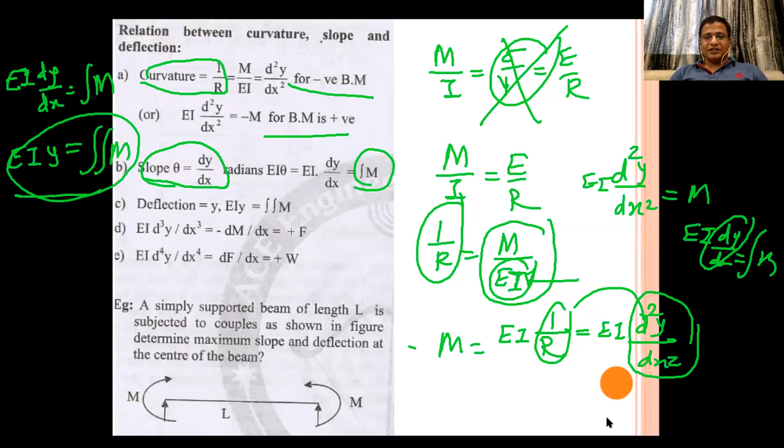So integration of dy by dx becomes y, and then you will get the double integration of m. This is how things work, and that is the fundamental for slope and deflection. What you see here is order reduction takes place - meaning there is a one-level order difference between slope and deflection.

Similarly you have the same kind of relationship for shear force and load, which we have also seen in the flexural case. So you can remember that too. These are some of the pointers you will need for solving problems or giving theoretical answers.

So what are the methods for calculating slope and deflection? There are 4 methods actually. Here it is written Macaulay's method. Besides that, the last type of method comes under a category called energy methods. All these fall under energy methods, whereas the others are kind of empirical or analytical methods.

One is the double integration method - just now what we saw is the double integration method, and we have to remember, this is not suitable for solving big problems.

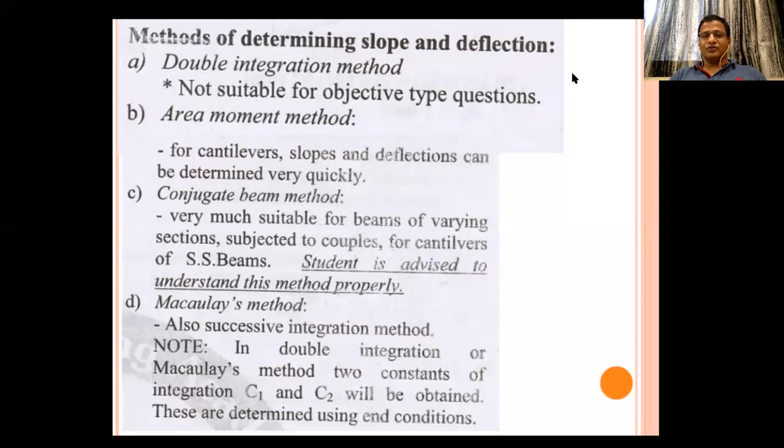So mostly whichever problem comes, you should start with a conjugate beam, and then Macaulay's method for very few cases, otherwise that is not preferred. Another method, energy method, we will see, that is also very important. Moment area method - you have to understand what is the moment area method. There are two theorems.

Hello, I was disconnected. I hope all are there.

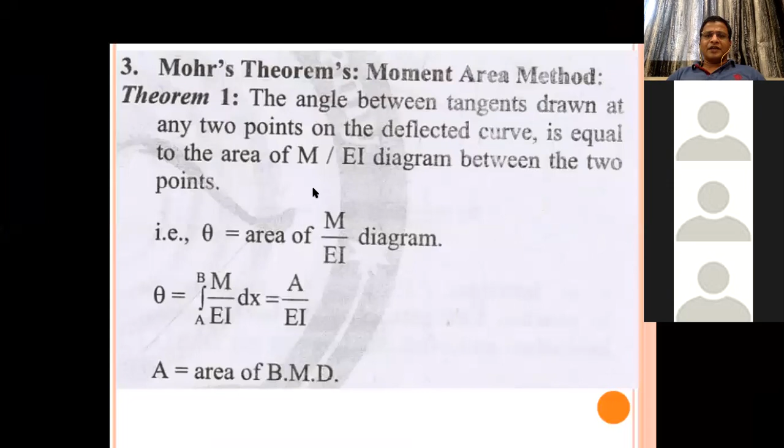Okay, so what we are seeing is the first method, that is the moment area method. In moment area method, what we see here is the angle between two tangents drawn at any point on the deflected curve is equal to the area of the M by EI diagram between the 2 points.

And what is the difficulty in this method is this: if one angle is not zero, then it becomes complicated. Because this formula is θ1 minus θ2 equal to area. Actually whatever theta is written here, this is θ1 minus θ2. And when it is a cantilever beam, the fortunate good part is that one side's slope, when you draw 2 tangents...

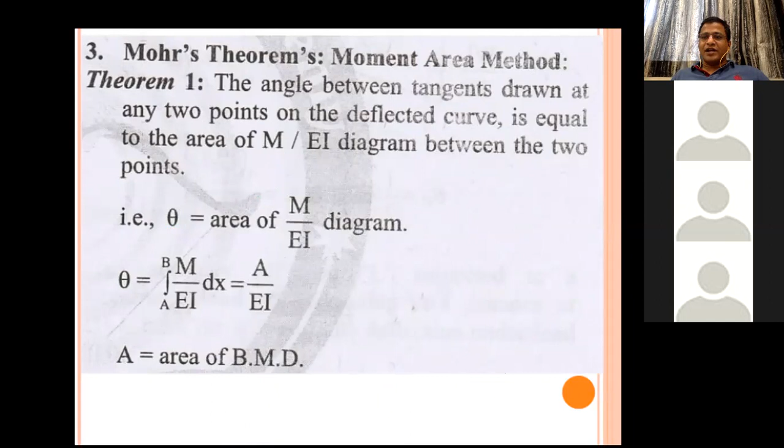one side's slope is 0, the other side's is non-zero. That's why this method is good for a cantilever beam. But in case of simply supported, if you draw two tangents, there is one theta1 on this side and theta2 on this side, and that time slope calculation becomes difficult. That's why for the simply supported case, this method becomes complicated, but for the cantilever beam it is very easy.

You can quickly get the answer for the cantilever beam. So slope is nothing but the area of the M by EI diagram, that is the bending moment diagram - you have to get it and then divide it by EI to get the answer. Similarly, you can calculate using the second theorem.

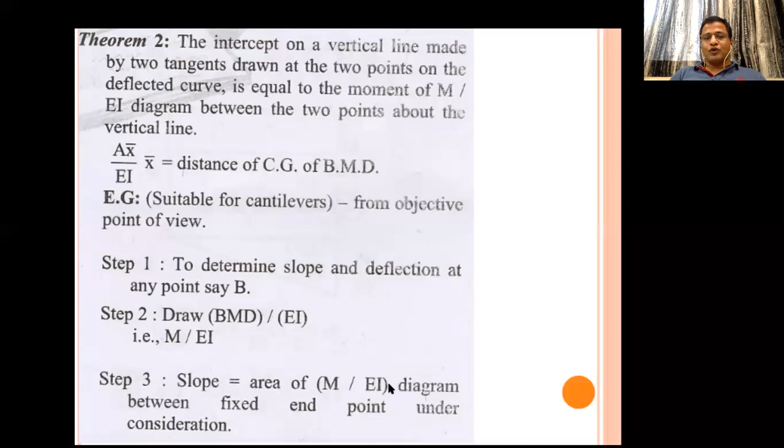What is the second theorem? The intercept on any vertical line made by two tangents - rather than remembering it in such a complicated way, this is again: slope is the area under this, and then you have to get the deflection as a moment of the BMD area between the fixed point and the point where deflection is required, taking the moment about the CG, that is the moment area.

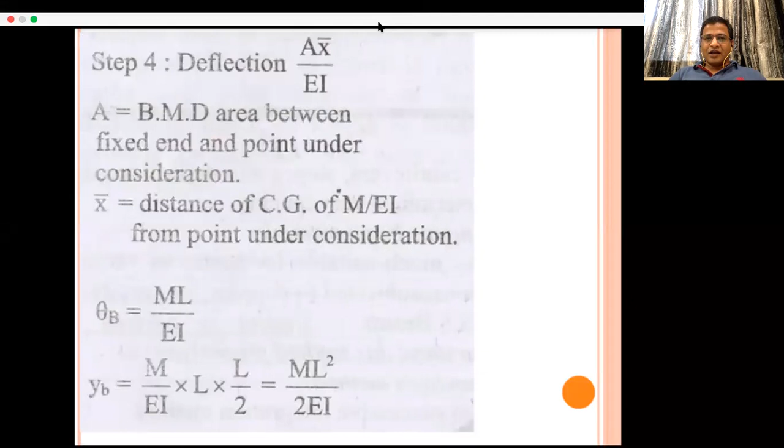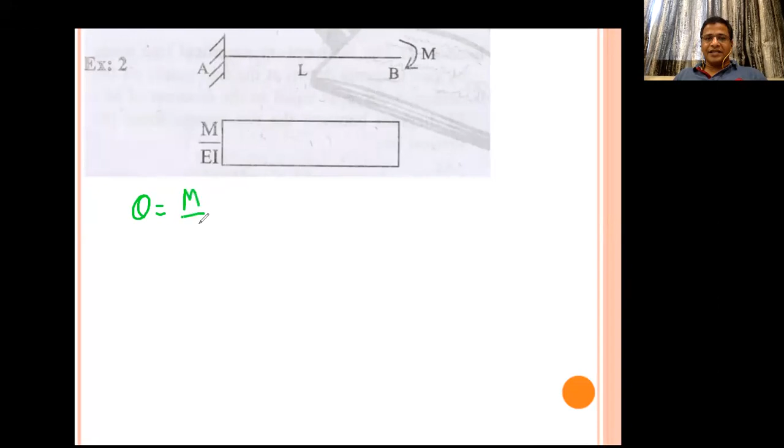Theta is equal to area under this curve. So what is the area here? Height is M by EI, whereas width is L. So theta slope at B will be theta B, I'm saying. Theta B is equal to ML by EI.

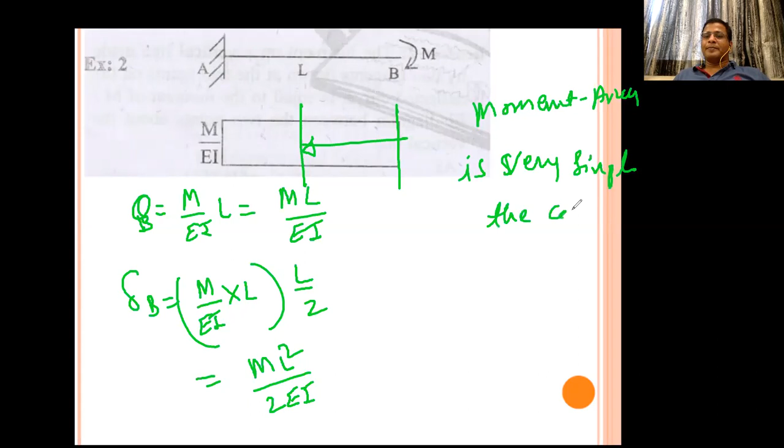For the cantilever. So what is the moral of the story? What I want to tell you here, what you should remember, is that this method we are studying, called moment area method, is very simple for the case of a cantilever beam.

So maybe if you allow me, I don't know whether I have that example. Okay, that example is not there, but we can take one example here. Let me use this Jamboard. So we'll take another example here. Let me see.

Okay, is it visible? Another cantilever beam example we will take. Whether this board is visible - let us take a point load W applied, and this is a cantilever beam, applied at L by 2. And I want the slope and deflection at the free end.

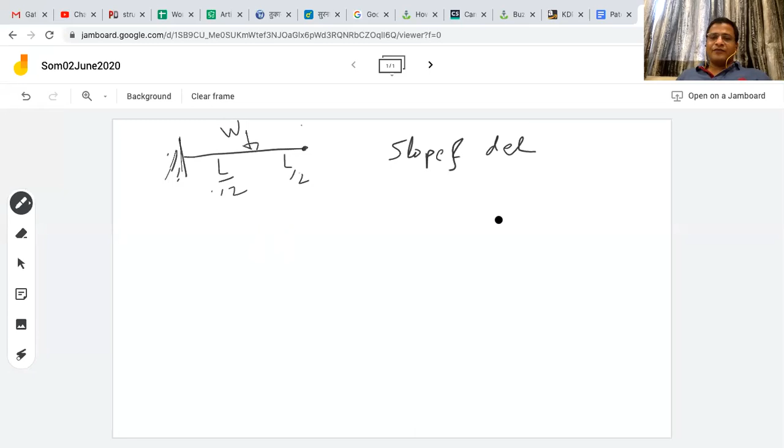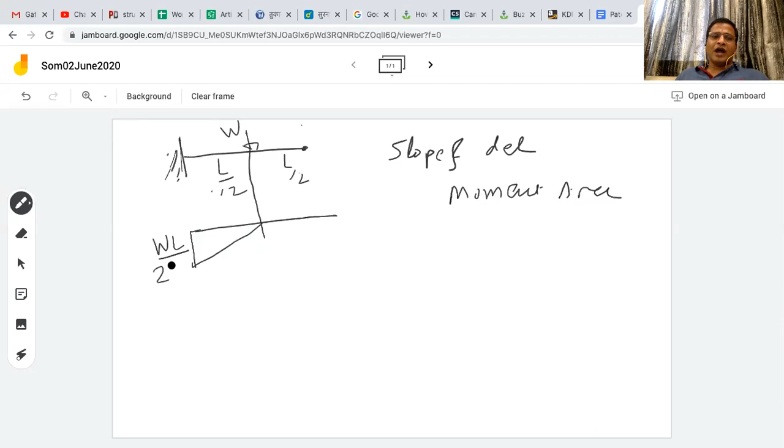And what method are we using? Moment area method only we are using. So how will the bending moment diagram look like? It will come here, and this will be the kind of bending moment. So it will be WL by 2 divided by EI. So this is nothing but the M by EI diagram.

Now, what is theta B we are asking? Theta B is, of course, very simple, area under curve. So it will be 1/2 height is WL by 2EI, multiplied by... sorry, base is L by 2. Yes, base is L by 2. And it comes as WL square divided by 8EI. That is the slope here.

Now, what is deflection at B? This is the area, I can take it as is. So what was that? WL square by 8EI is the area. And where will be the CG? Here. So it will be 2/3 of L by 2, plus this distance, that is L by 2.

So multiplied by how much? 2/3 of L by 2 plus L by 2. So you can simplify, L by 3 plus L by 2. What is that? Taking base as 6, 2 plus 3 gives 5L by 6. So it comes as 5L by 6. So 8 times 6 is 48EI, and then 5WL cube, so it will come as 5WL cube by 48EI, something like that.

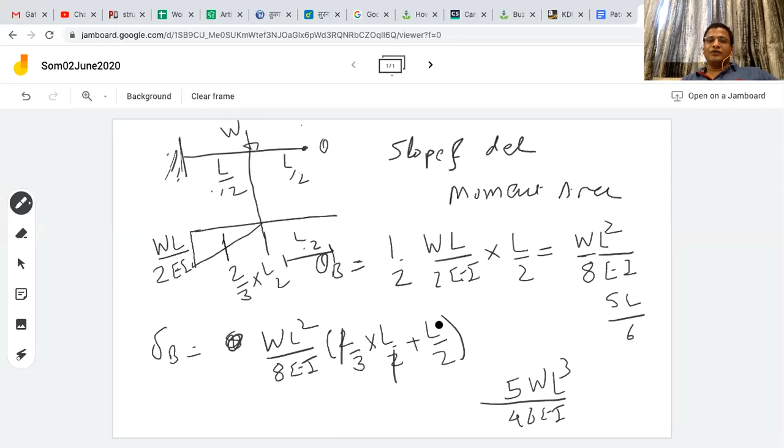Is it clear? That's how you have to work it out. Let us go back maybe.

One more example, if you are interested - let us take a cantilever beam with UDL and see how slope and deflection come out.

So cantilever beam with W as a load. Does anyone know the formula for such a curved shape? I guess it's 1/3 base into height. Yes, correct. So it will come as WL square by...

2, that is the bending moment divided by EI. To calculate theta, you have to calculate this area. So it is 1/3 height, which is WL square by 2EI, and base is L. So it will come as WL cube by 6EI. Okay, and deflection will be what?

Again, this CG, I don't remember exactly. You have to multiply this area by CG - that's how you calculate it. What I'm trying to tell you is you should remember this CG value for the parabolic case, for the UDL.

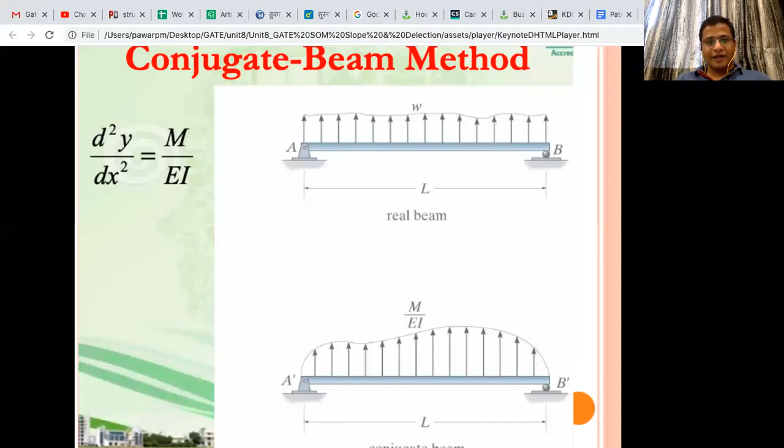Let us go to the method called conjugate beam method. First, we will learn to convert to the conjugate beam, and then understand what is the slope and what is the deflection. This is the normal beam, and this is the conjugate beam of it.

If W is a UDL, first you have to draw the bending moment diagram, divide it by EI, and that much load you have to apply - then the boundary conditions will also change. So then what is the slope?

Slope, theta, is nothing but SF at any point. If you want, I will write it once again here: slope of the real beam at any point is equal to SF in the conjugate beam at any point.

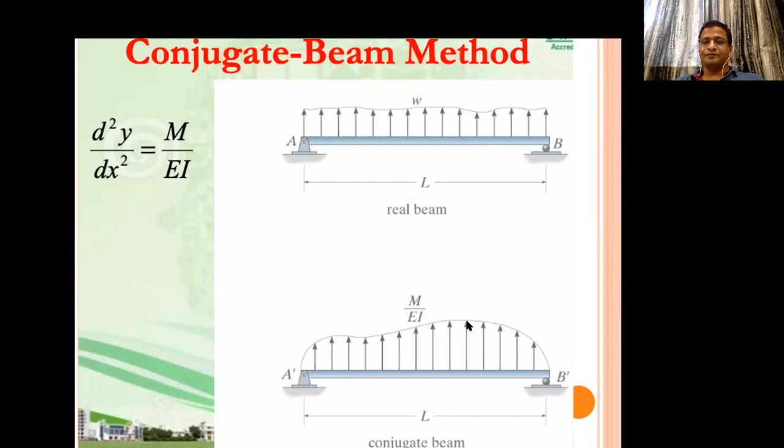Okay, let's take this example and try to understand it here. Some load is applied, and the question is asked to find out - there is a cantilever beam.

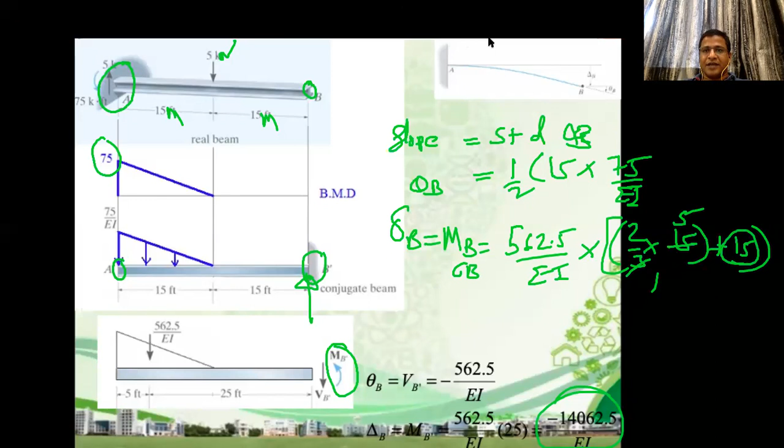Now maybe we will go to the next slide. One more thing - let us understand the relation.

In the real beam, if it is a pin, the conjugate beam will also remain a pin, meaning simply supported will remain simply supported. If it's a roller, it will remain a roller. Fixed will become free - if the real beam is fixed, it will become free in the conjugate beam. If the real beam is free, the conjugate will become fixed. If an internal hinge is there, it will become a kind of roller. If internal roller, it will become hinge; if hinge, it will become internal roller.

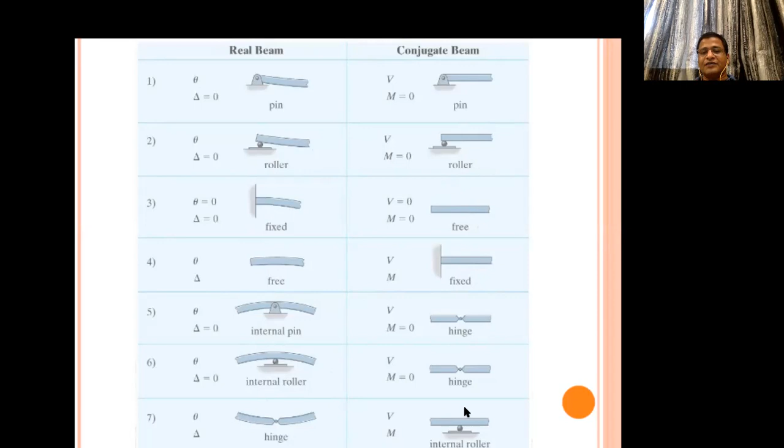So we'll take some examples to understand. You see this is simply supported, it will remain the same. So fixed becomes free, free became fixed. So here, this hinge remains hinge, this internal will become internal hinge, and free will become fixed, and likewise you will have to modify the boundary conditions.

Okay, so here there is another example of a simply supported beam, and we'll stop for this method and go to another method.

So what is here? You can say this is a simply supported beam where the 8 kilonewton load is applied, and if you solve summation of forces equal to 0 and summation of moments equal to 0, you will get the reactions. If you have forgotten, let me solve quickly. 8 kilonewton load is applied here, and this is 9 meters and this is 3.

So you can say RA plus RB is equal to 8 kilonewton, and then if you take moment about A, it will become minus 12 RB plus 8 into 9 is equal to 0. So you will get RB is equal to 6 kilonewton. And then if you substitute here, you will get RA as 8 minus 6, which is 2. So that's how you will get the reaction.

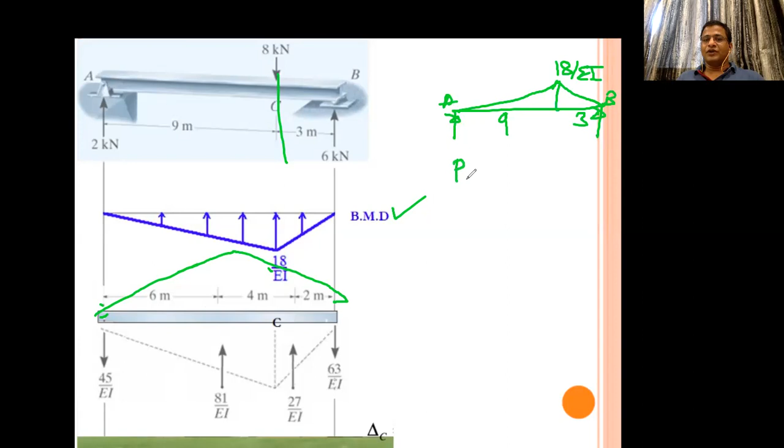So for this conjugate beam you have Ra plus Rb is equal to the area under the curve, that is half, base is 9 plus 3 equals 12, and height is 18 by EI. So 2 6s, 18, 6s, how much does it come to?

108 by EI. Now you can apply, you can take summation of Em equal to 0 here, and you will see minus 12 Rb minus 12 Rb, plus this you can take separate area, this you can take separate area. So let us take this area.

So it will come as 18 by EI multiplied by, so 1/2 you have to take, 1/2 18 by EI multiplied by base is 9, it's a CG, from this side it will be 2/3 of 9, plus you can do it for this one. So how much is that? 1/2 18 by EI into base is 3, how much will it be? 1/3 of 3 is 1 plus 9, that is 10.

So here 3 3s are 9. Can someone help me in doing this calculation? And this is equal to 0, so that will give you Rb. See, if you substitute here, you'll get Ra, and that way you will get Ra and Rb, which are nothing but slopes.

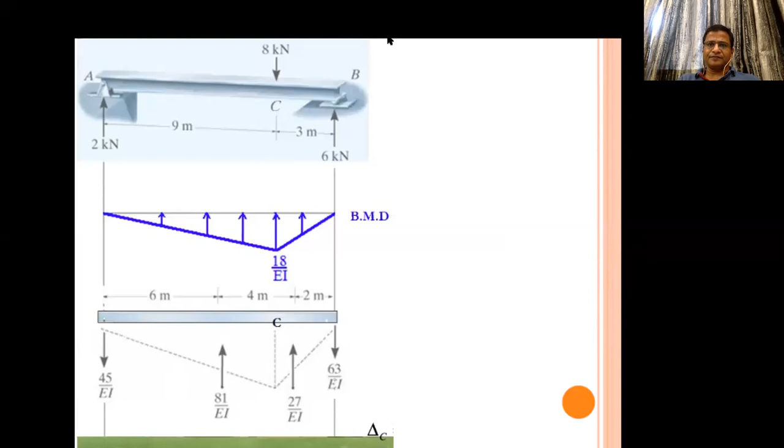That was the example. Now, a very important method, I don't know how much in detail you have studied this in your syllabus, energy related, maybe whether you got sufficient time or not. But this method we will spend more time on, which is very important from the indeterminate structure point of view, and also for solving any kind of problem for getting the beam deflection.

So you have to remember the formula for the strain energy, the formula for strain energy in bending. Of course, you will have the formula when we study the energy part. We will see the formula for other cases like axial strain energy, torsion strain energy, and shear force strain energy. But for the time being, we are focusing on the strain energy in bending.

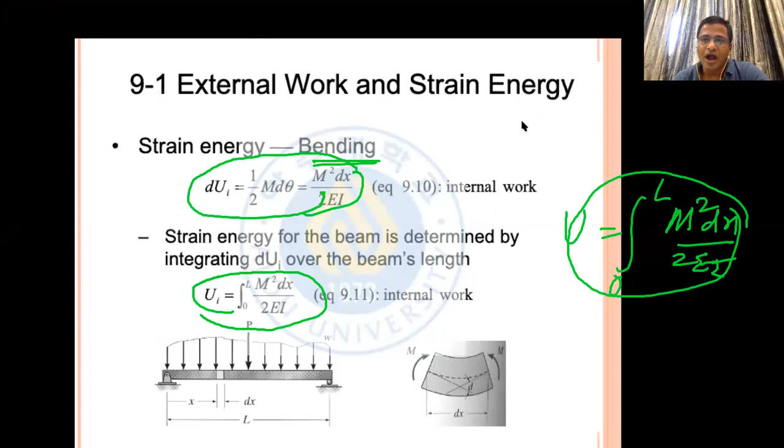U is equal to integral from 0 to L of m square dx by 2EI. This is the formula for the strain energy due to bending. I hope it is easy, m square by 2EI dx. Now how to apply this formula for calculating the deflection, that we will see.

This formula is applied for calculating the deflection using Castigliano's theorem. So what Castigliano's theorem says is you can either apply work principle or Castigliano's theorem. We will apply Castigliano's theorem only. I will show you that, and then we can come back here.

So maybe here itself I will write. So what is Castigliano's theorem? It says that del U by del P is equal to deflection. That means if you want the deflection, then you take the derivative with respect to applied load. That is, if you take the first derivative with respect to applied load at that location, you will get the deflection.

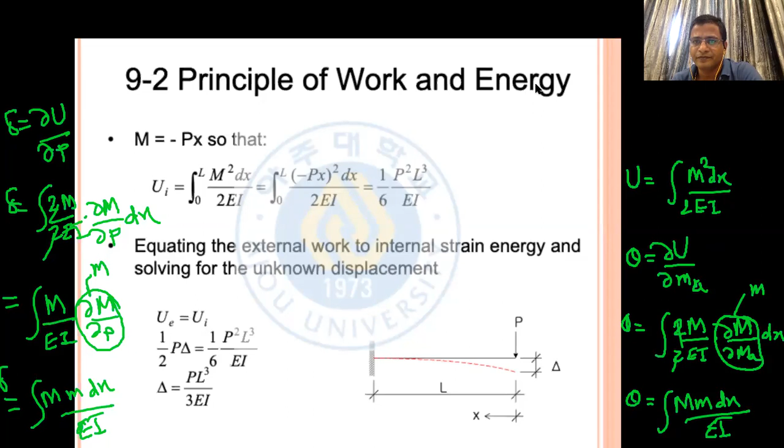So maybe we will take a cantilever beam. Here example of cantilever beam is taken. We will apply that formula for calculating the slope and then also deflection.

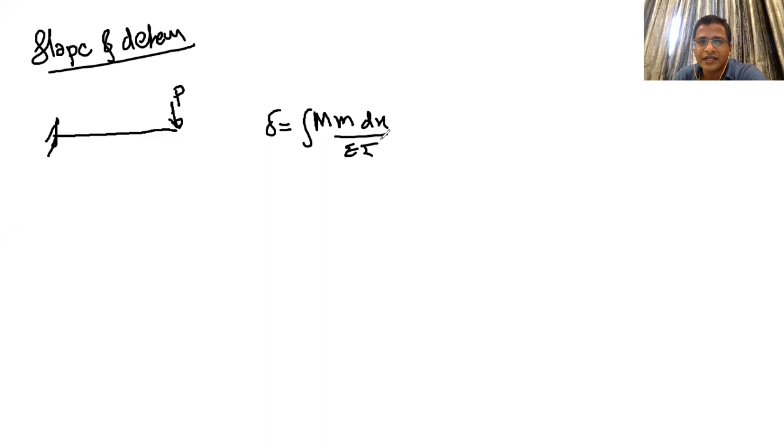So we'll take an example of cantilever beam. Suppose P load is applied here, and what we have to find out is slope and deflection. We know it, but we will apply this method. So how to apply? We know this theta or delta, same formula. So we'll write delta equals integration M dx by EI. Only this unit, because of unit load, whatever M is generated, we have to consider. Theta is also similar formula, M dx by EI.

Now we will focus on slope. What is M? M is moment generated, we'll call it Mxx, moment generated because of external load. So M is nothing but Mxx, it will be nothing but P into x, if you have this distance as x, P into x. So what is small m? Now I'm interested in slope. Slope is related to moment, we have seen. So I am applying unit moment here. If you see the bending moment generated, we have seen that diagram just before this, so it will create unit bending moment. So at any location, if I take a section, small m will be nothing but 1. So small m will be nothing but m, 1.

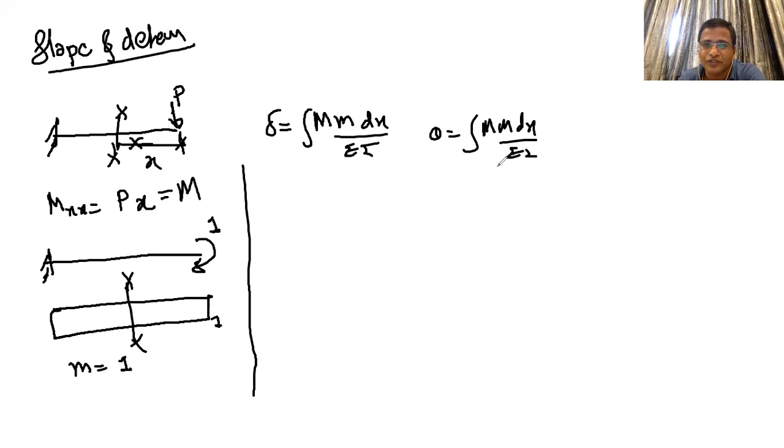Now you know capital M is this and small m is this. If you substitute in this, we are focusing on slope. So theta will be nothing but integration, total length 0 to L. It will be P into x, and small m is 1, into dx divided by EI. Then if I integrate, P by EI is constant, will come out of the integration, and integration of x will become x square by 2, limit 0 to L. Then if you put x as L, you know the formula, PL square by 2EI will come. Is it same answer? Yes. So slope we have understood.

Now we will focus on the deflection. For the deflection, M part will not change. What will change is, instead of unit moment, we will have to apply unit load, that is unit point load. So I'm applying unit point load. And because of this unit point load, how much moment will be generated is small m, that is 1 into x.

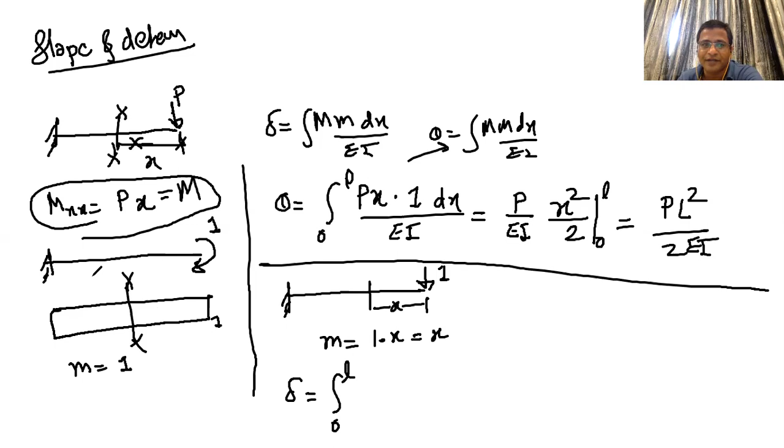And that will be nothing but x. If you substitute that, delta will come as an integration 0 to L. Capital M is already calculated as px, multiplied by small m which is x in this case, divided by EI. So what will become? Px square by EI.

P by EI we can take out of the integration, and the integration of x square will come out as x cube by 3, from 0 to L. So p by EI, and if you put this, it will become L cube and 3EI. So delta will come out as PL cube by 3EI. We know the standard formula. This is how the unit load method works.

So we can repeat this same example for you to understand it clearly by taking UDL. You have seen that for the conjugate beam, UDL had become a little difficult. Now we'll take the cantilever beam example of UDL, and also one simply supported beam example, so that you understand this energy method very nicely.

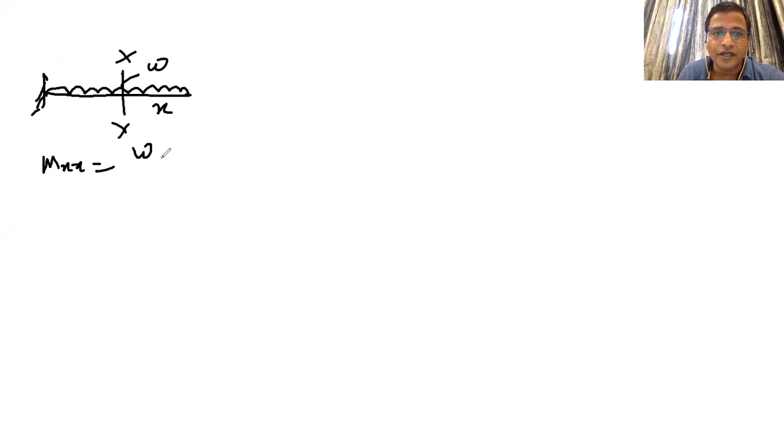Now first we have to calculate the slope. So because of this UDL, how much will be the Mxx generated? Mxx is nothing but w into x by 2, which is equal to wx square by 2.

Now you have to calculate small m. How will you do that? You remove this UDL and then apply unit moment, and you know small m will be nothing but 1 only in this case, because we want slope here.

So what you get is theta is equal to integration 0 to L. Capital M is this, so the formula is M by EI into dx, which is equal to integration 0 to L of wx square by 2EI, and small m is 1 only. If you integrate, w by 2EI is out of the integration since it's constant, and the integration of x square becomes x cube by 3, limit 0 to L.

So theta will be nothing but, what will be the answer? WL cube divided by 6EI is the answer. Any doubt about this? You can ask me.

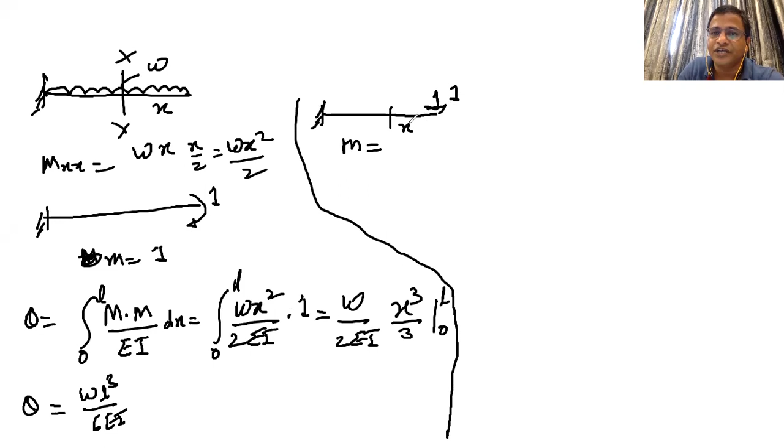Similarly, now we will do this for the deflection. Instead of unit moment, we are applying unit point load, and because of that, small m will be nothing but 1 into x. That's why same formula: delta is equal to integration 0 to L of capital M into small m, dx by EI.

This is equal to 0 to L, where M is wx square by 2EI multiplied by x. Now it will become wx cube. You can take out w by 2EI common, and the integration of x cube will become x raised to 4 by 4, limit 0 to L.

So delta will be WL raised to 4 divided by 8EI. So you can remember this standard formula for slope and deflection of a cantilever beam with UDL.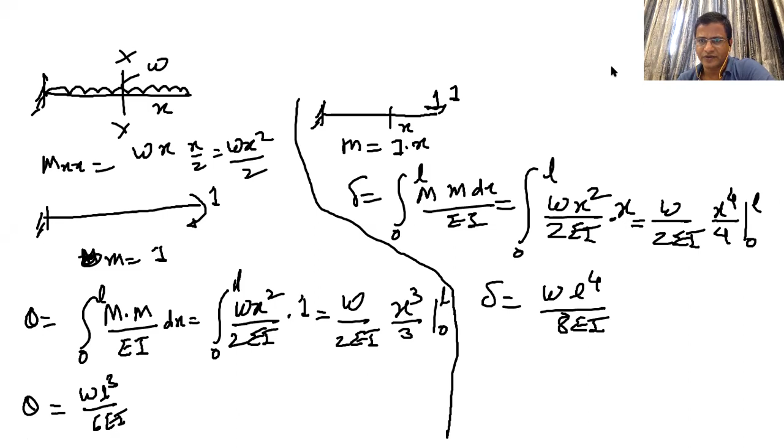Shall we try one example for the simply supported case? Let us take the simply supported case, and we want to find slope and deflection at this location only. First of all, we will take the simplest one.

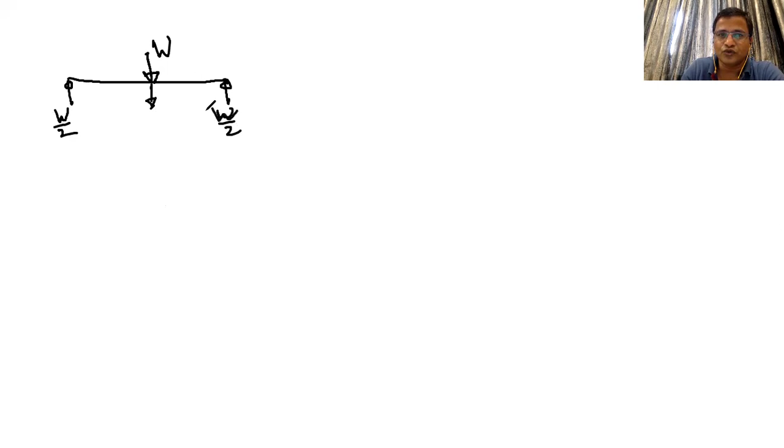So what will be, in this case, the reactions? This will be W by 2, and this will be W by 2, with L by 2 and L by 2. So what is the slope at this location? We have to find out. So how will you find the slope?

You have to get theta is equal to integration, and similarly you will have to apply unit load, then unit moment. This will create a kind of complicated stuff, but instead of that, if we apply...

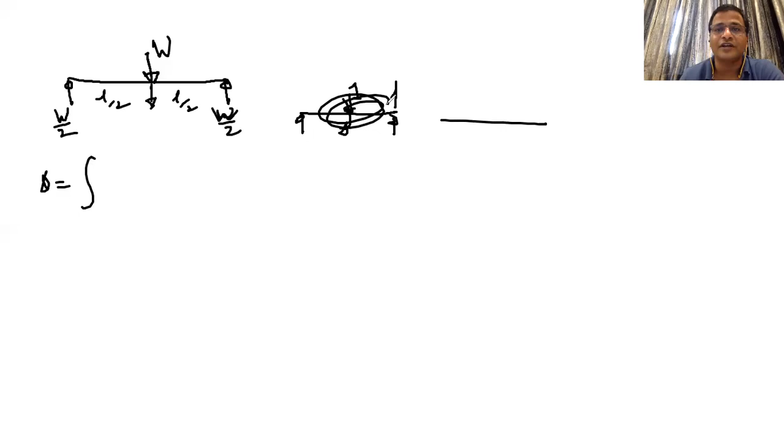So in such a case, if you apply the tabular method, there's one more form I will tell you. Let us apply the tabular method, which will be useful in such a case. So how to do that? Let us take the...

Okay, is it coming now? Or we said audio is not coming correctly?

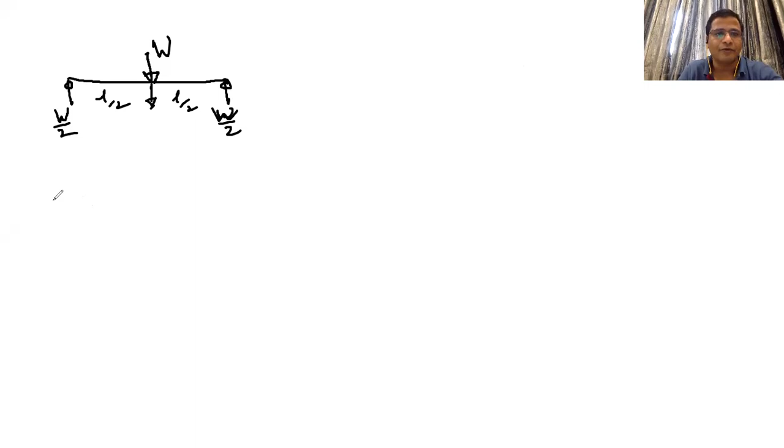So we'll take the tabular method. In the tabular method, what you will have to do is take a section here, and then we have to find out the deflection for this. So deflection we have to find out, and slope here we have to find out.

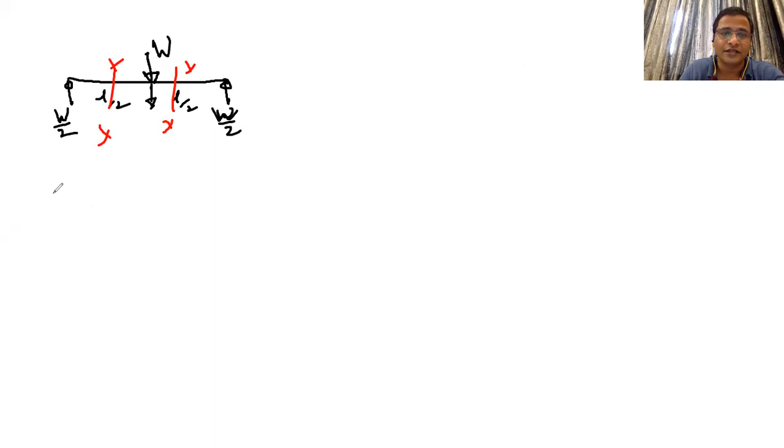So we will take the first section, we will call the sections A, B and C. We will take the first section as B to C, so BC section, and then we will have capital M, and small m. What is small m? It's del m by del w, which we call del m by del w, because we are calculating this ourselves.

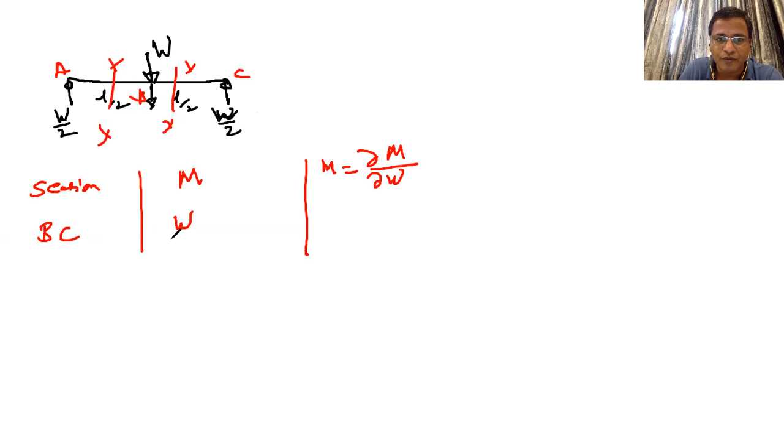So what is the moment here? It will become w by 2 into x. And then del m by del w, if you take derivative with respect to w, it will become x by 2. It's very simple. So we have taken a section here, w by 2 into x, wx by 2, and I have taken derivative with respect to w. Then we put limits 0 to L by 2, and EI is EI only.

We'll take some numericals also, so instead of this notation form it will be easy. Similarly, we can get for the AB section. So what is the AB section here? It will be the same, because it is a symmetric section, w by 2 into x, and the derivative will be x by 2. Here it will be 0 to L by 2 and EI.

And then you have to apply this - first of all, deflection we will calculate, because we took derivative with respect to w, we did not apply unit moment. Slope calculation is a little difficult. Deflection we will calculate, so del u by del w is nothing but deflection, and that will give us u, which is m square by 2EI.

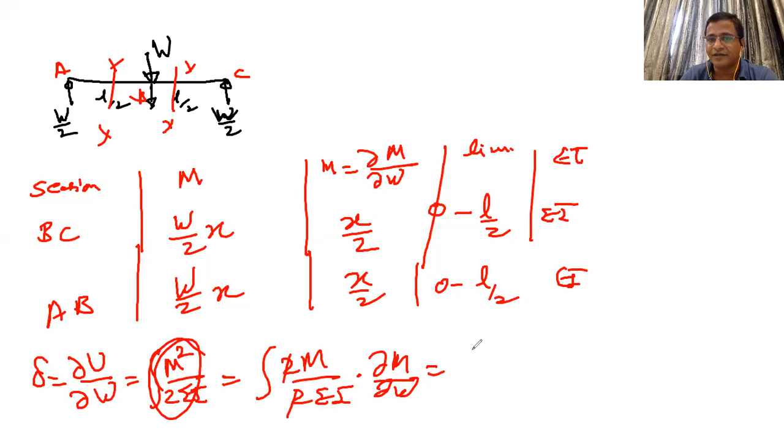And if I take derivative of this with respect to w, it becomes 2m by 2EI into del m by del w, and then you can see the 2s get cancelled, giving m by EI into del m by del w. Del m by del w is here, so you can apply it. Now as these two sections are the same, I can multiply by 2 and take one part only, so integration will be 0 to L by 2.

And then m is wx by 2, and another m is x by 2, divided by EI, which I have taken out. So you can see 2 2s are 4, one 2 can be cancelled here, and it comes out as wx square, and if you integrate it comes out as wx cube by 2EI into 3, with limits 0 to L by 2, and then you will see this deflection comes out as wL cube by...

Sorry, it is L by 2, cube of 2 is 8. So 2 times 3 is 6, and 8 times 6 is 48 EI. So I guess we got the correct deflection: WL cube by 48 EI.

So that is how you will have to apply this energy method. Let us take one numerical to find out the deflection, and then you will understand how to find the deflection.

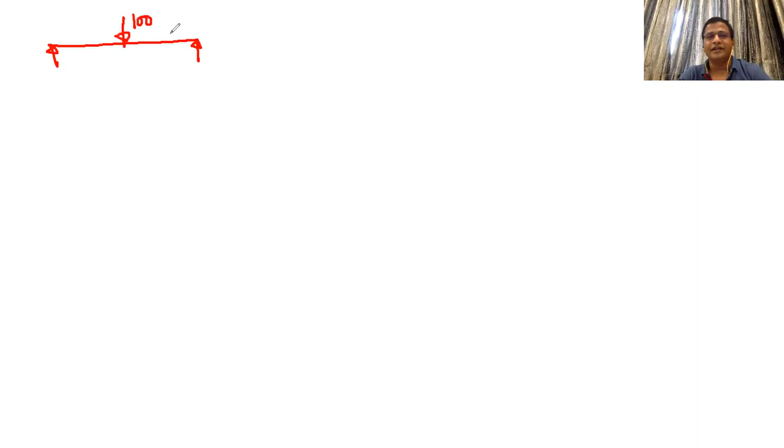Let us take some value, say 100. Okay, if you get such an example and you have to solve by energy method by putting 100 as a numerical value directly, you will not be able to solve the example. So you will have to label it as P. If you take it as 100, you will not be able to take the derivative. That is the difficulty in this case.

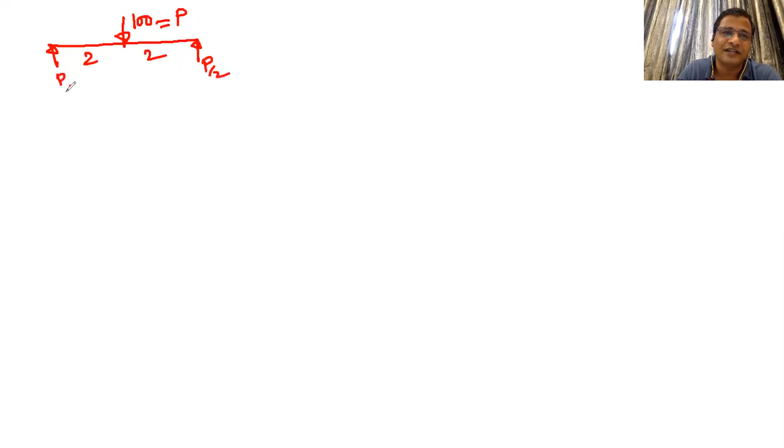Again, you will have to say P by 2, P by 2, and do it the same manner in the energy method. Even though you get numbers, you will have to put them into some kind of notation form. Then after taking the derivative, you can substitute that P value. Otherwise you will not be able to take derivative with respect to 100. That is one more difficulty in this method.

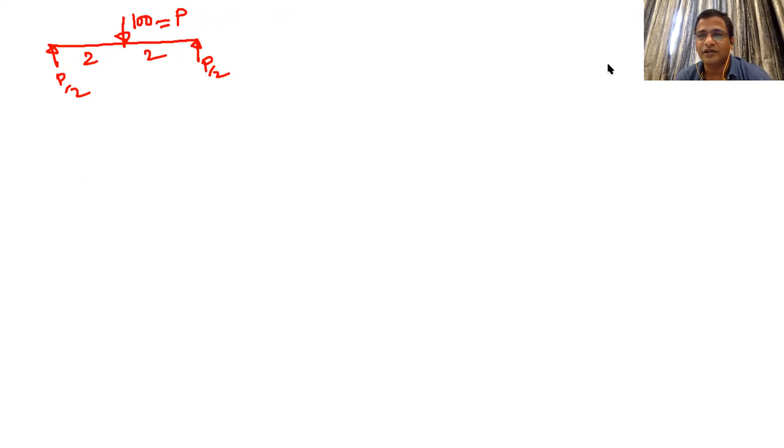So let us go to the next slide. I will stop this method and share the slide.

Okay, let's come back here. These are here, some more examples are there. Unit load method I have discussed. Let's go now to some examples. We have almost 45 minutes. We can take examples which are asked in the exam. We have understood various methods, what are the pros and cons of various methods, and now we'll see.

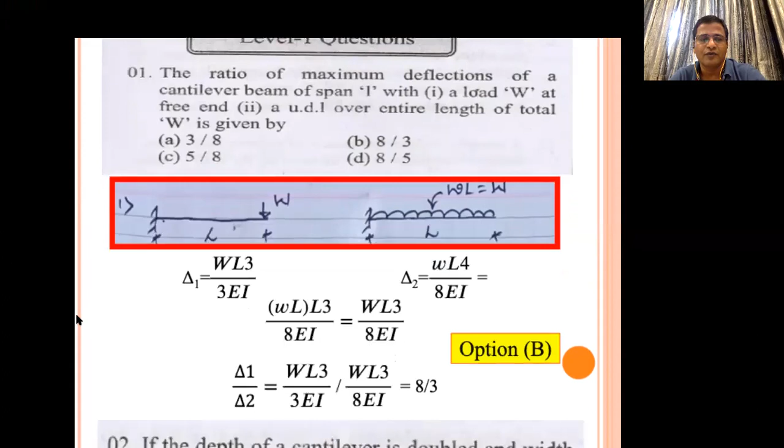Mostly you'll see the examples will come based on the standard formula you will have to remember. Maybe for your reference, I will show you what is meant by the standard formula. Here at the end of the presentation, I have added the standard formula.

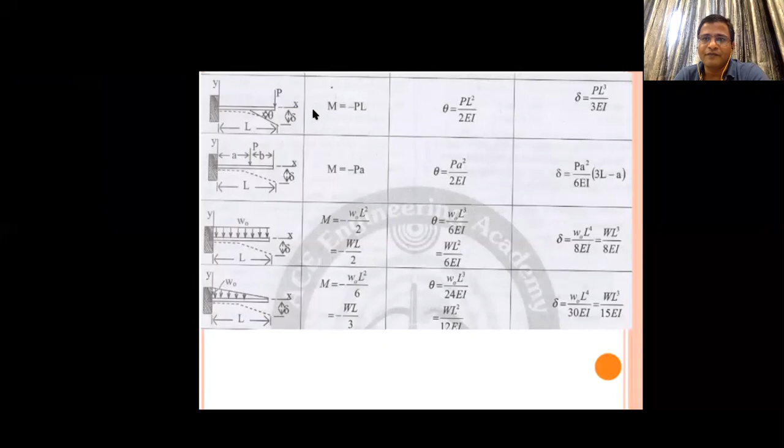Just now I derived a few formulae. So similar formulae, first we'll see. You can remember such a table, whichever form: M, theta, and deflection, that is bending moment, maximum bending moment, slope and deflection. So these are the formulas here for the cantilever beam, and then there will be formulae for the simply supported beam. For the cantilever beam, just now we derived the formula for point load.

Slope is nothing but PL square by 2EI, whereas deflection is PL cube by 3EI. If it is at A and B, if P is there, you can remember instead of L it will become A square, A being from the fixed end, and here deflection is a little different: PA square by 6EI, 3L minus A.

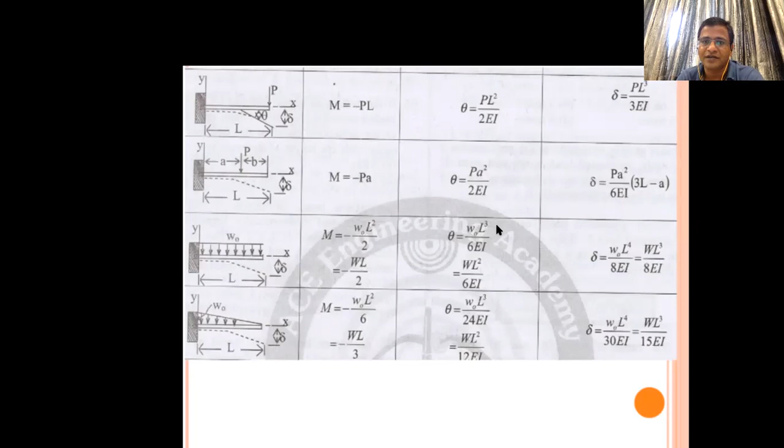Similarly, for UDL, what is the slope? Just now we derived WL square by 6EI and WL cube by 8EI. That is what we derived. If you want to remember further complicated ones, but at least these two, the first one and this one, you should remember, that I will recommend. Then if you have a moment couple, this also we derived the formula for today. So that formula you can remember, that is ML by EI, and then it will come out as ML square by 2EI.

And then for the simply supported beam, point load at the center, what is the formula for maximum bending moment? It is PL by 4, and then the slope at the end, it will be PL square by 16EI, and deflection at the center. Please understand, the slope at the center for the simply supported beam - I hope you remember. I will draw also so that you can understand.

For the simply supported beam, if you see, the slope will be something like this - maximum slope will be here and here, but slope at this point becomes flat. So slope at the center for the symmetric simply supported case, whatever symmetric load you apply, slope will be zero at the center, whereas maximum at the supports. So slope at the supports will be PL square by 16EI, and deflection is PL cube by 48EI.

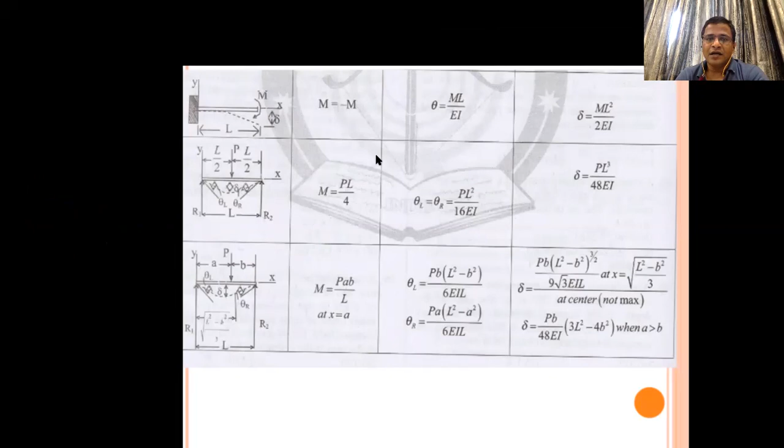And similarly, if you want at A and B, you can remember. For UDL also you should remember, when UDL is there, what is the slope due to UDL, and what is the maximum deflection. This is very important, several times this question will be asked: 5WL cube by 384EI, and then slope at the ends for the simply supported and UDL case is WL cube by 24EI. So that's what you can remember.

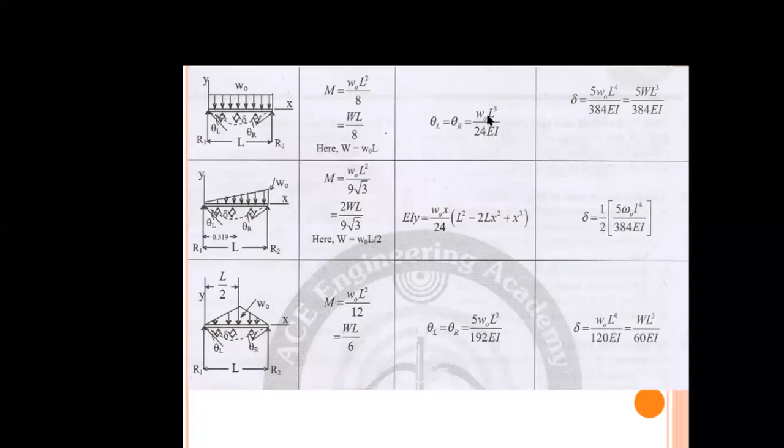Now, once you know this formula, solving will become easy in this case. That's why as part of competitive exam preparation, you need to mug up these formulas.

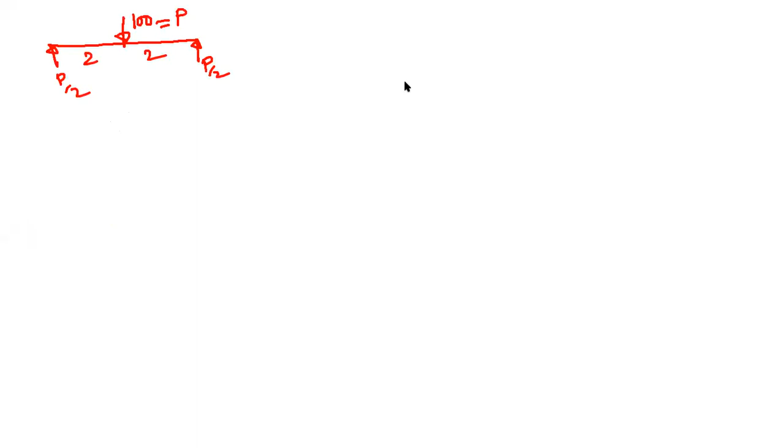Okay, so I'm again on whiteboard. Let me take one example of maybe a determinate frame. If we take a determinate frame here, so let me take a frame here, like this, A, B, and maybe C.

And what I am doing here is applying a 10 kilonewton load. In the first phase, we will find out deflections. We will find out two deflections. So you can note in the frame, there will be a vertical deflection and a horizontal deflection. So first of all, we will focus on the vertical deflection.

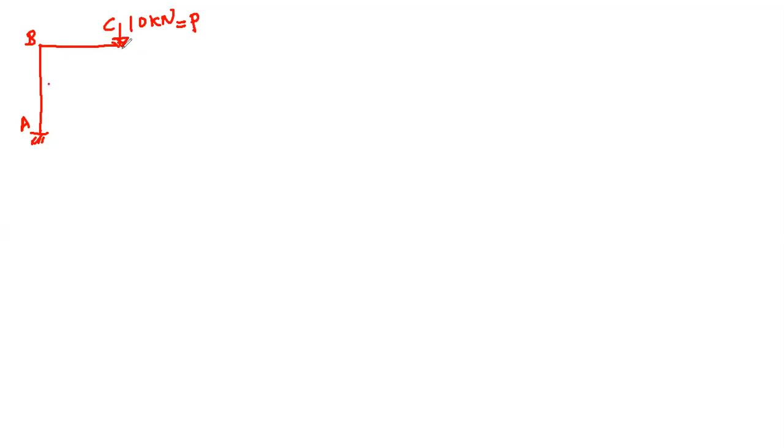As I told you earlier, if we have to denote this by some load P, otherwise we will not be able to get the answer, so we will make this problem complicated. Let us call this a 6 meter member with EI, and this a 4 meter member with 2EI. And what we need in the first phase is the deflection here. So how do we calculate the deflection? That is the question we have.

So as I told you, we'll apply the tabular method the way we have done, and then the unit load method. So there are two sections: one, you have BC, CB will be there, and AB. And that's why if we can calculate the reactions here, it will be easy.

As 10 kilonewton load is there, downward, so there will be an upward reaction. We have labeled that 10 kilonewton as P, so this upward reaction is P. And then the moment generated, MA, will be how much? It will be P into 4, going anti-clockwise. So this resisting moment will be this one. So MA, opposing, will be P into 4, that is 4P. And horizontal, as there is no horizontal load, horizontal reaction will not be generated here.

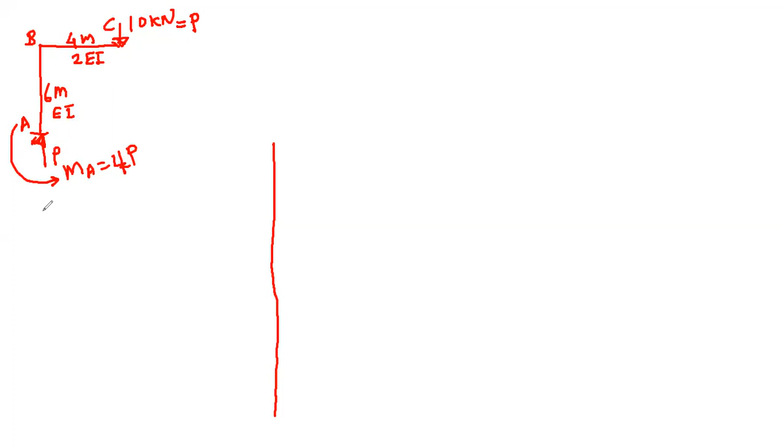So I hope you have understood this. As the 10 kilonewton downward, which we have labeled as P, P will be upward. This P is going clockwise, multiplied by lever arm 4, and this balancing moment will be 4P here.

Okay, now we will take the sections one by one and calculate. We call it section, then capital M and small m, and then limit and EI. Section first we are calling the CB section.

So what will be the M value for the CB section? It will be P into X. As it is pushing downward, when we go through the frame we have to be careful about sagging and hogging. It's pushing downward, so we call it negative, minus. And if you take the derivative, what is small m? Small m is nothing but del M by del P, so since P we are taking, small m equals del M by del P.

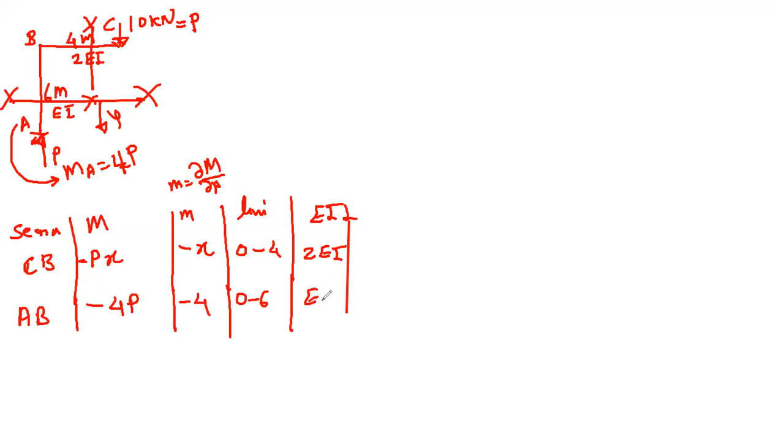Okay, so now we have this, we will apply the unit load method. Delta equals the integration from 0 to L of M into m, dx, divided by EI. Now we have two sections, so this will become 2 times. First will be this part, first part, so the limit for the first part is 0 to 4.

Capital M is minus P into X, and small m is minus X, and dx, divided by EI. Now EI is 2EI. So EI is 2EI, you have to be very careful about this.

Plus, now we will go to the second part. Integration will be from 0 to 6.

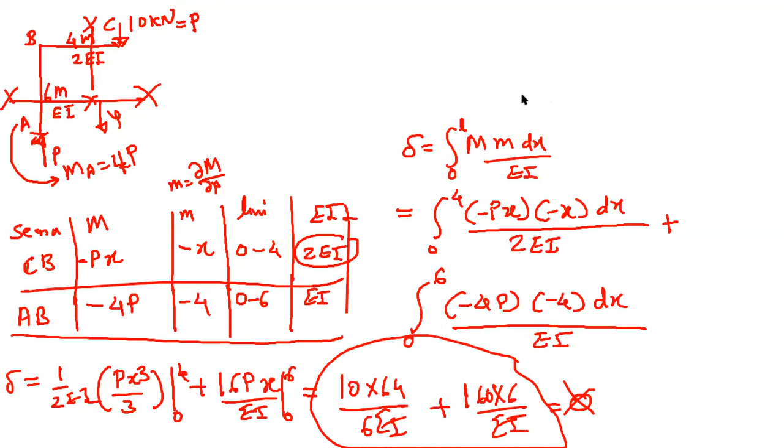So this is one more frame example of how to solve using this unit load method. I wanted to show you this, which you might have seen in the case of stiffness method. My lectures are available, but I wanted you to have this understanding once again for the determinate case. So let us come back to the presentation, I'll share the presentation.

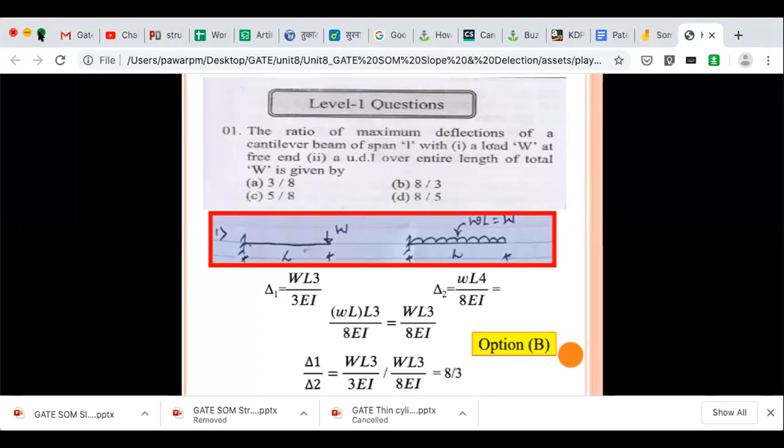And try to solve some of the examples. We have half an hour, let's see how many examples we can solve.

The ratio of maximum deflection of a cantilever beam of span L with load W at the free end, and UDL on the entire span - what is that? You should remember the formula, once you remember it, it is very easy. Delta 1 by delta 2, you take the ratio and it comes out as 8 by 3. For that you should know WL cube by 3EI, and WL raised to 4 by 8EI. If you take that, you will get this answer.

If width of the cantilever beam is halved, and depth of the cantilever beam is doubled - so depth is doubled and width is halved, meaning if original beam is B by D, width is divided by 2 and depth is multiplied by 2, then what happens to the deflection of the cantilever beam? Let us solve this interesting example.

So deflection of cantilever beam is WL cube by 3EI. By changing the geometry, we are not changing W, we are not changing L, we are not changing E, so all this part will remain same. What is different is I. So let us call it delta A with I A, and delta B with WL cube by 3EI B. Now you can take the ratio of that.

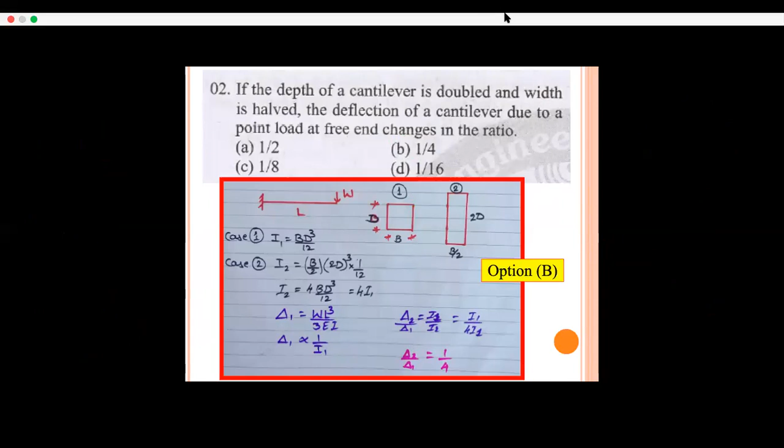You can see this is not a difficult example, but our only problem is we don't understand English. Once we start understanding the English part of the example, it becomes easy. In university question papers, that English part is very easy, but here the English part becomes complicated. That's why you have to understand it.

Let's go to the next example maybe.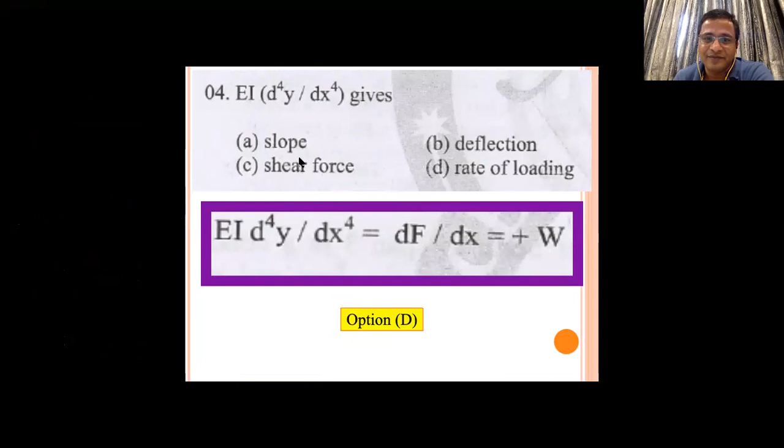You can go by the method of rejection here, since you know what slope means, what shear force means, what deflection means. So what is deflection? Deflection will be y, slope will be dy by dx, and shear force is EI into d3y by dx cube. Moment is related to EI d2y by dx square, and that's why this fourth order term is nothing but the rate of loading.

Let us go to the next problem.

Match the following. Once you remember the formulae, if you don't remember them it is a very difficult example; otherwise it is the simplest example. Little bit of arrangement here for simplification purposes. It is given: a cantilever beam subjected to point load at the free end. Match the following code and maximum deflection.

For the cantilever beam, it will be WL cube by 3EI. WL cube by 3EI, so that's 2. For A2, you can see there are 3 options, which means C gets vanished.

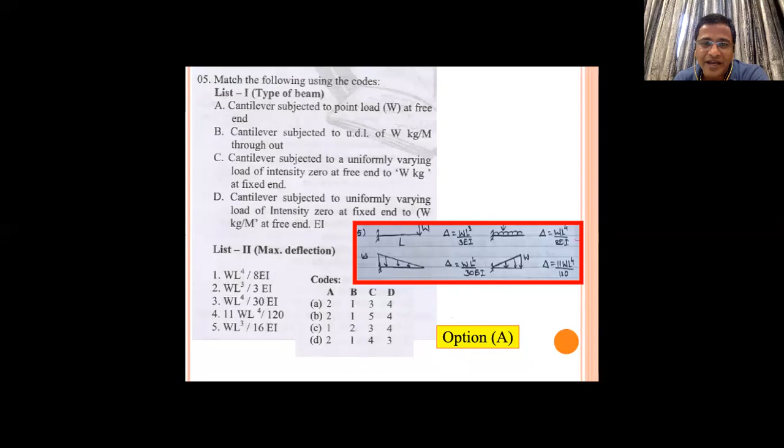Let's go to the next problem, the 6th one. An overhanging beam W - overhanging part we did not cover today, so we will see if we get something out of this.

An overhanging beam of total length L and uniform flexural rigidity EI has a concentrated point load P at each of the 2 ends. The beam is supported symmetrically on the 2 supports with overhang A on each side. Then the vertical deflection at the center is asked.

Maybe I will enlarge this. You can see the overhanging beam, P load is applied at both ends. Total length L is given. The center span will be how much? L minus A plus A, that is L minus 2A. So that will be the center span.

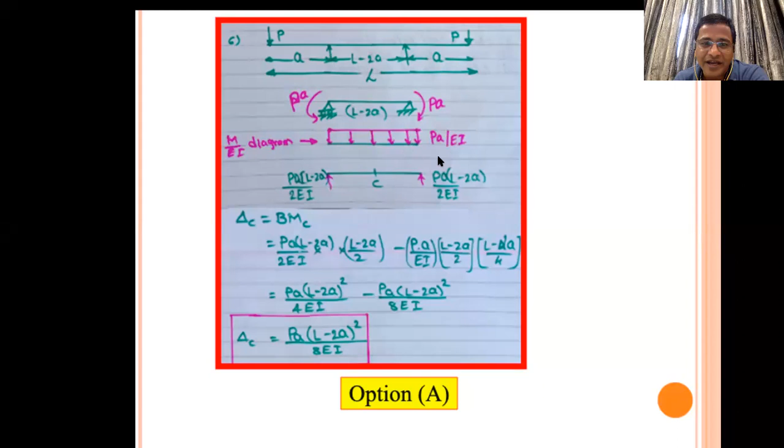So this can be simplified very nicely. You can convert this into moments PA and PA, and from that you can draw the moment diagram. It will be a rectangular moment diagram of magnitude PA. Then it becomes very easy to find the deflection. We can apply the conjugate beam method, or even the moment area method also.

If you want to find out the deflection at the center, let's try doing this. The bending moment diagram comes out like this, PA by EI will be the bending moment diagram, and at the center you want the deflection. As this is symmetric, you can choose half the area, and then take the moment, which gives deflection by the moment area method. So delta will be how much?

Its area will be PA by EI as a height multiplied by L minus 2A divided by 2, because total length is L minus 2A divided by 2, this becomes the area, and then further half of it will be its CG, that is L minus 2A divided by 4. Okay, very nice, we got the answer.

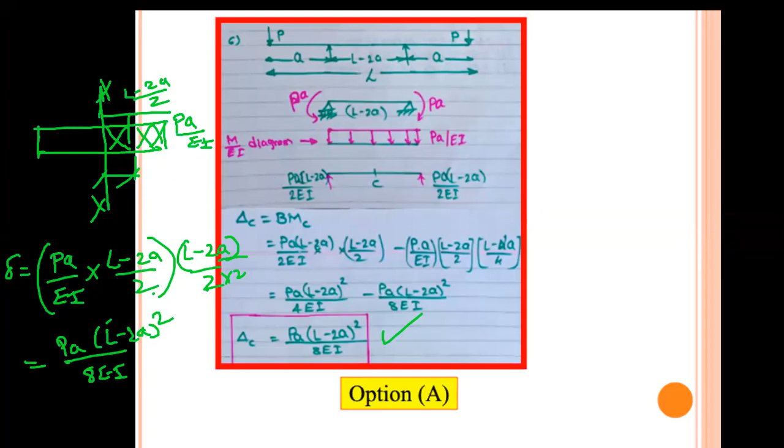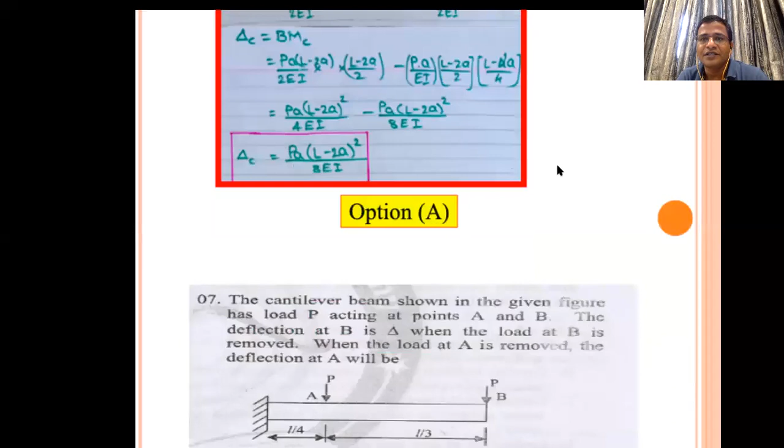I guess this is the simplest way, the moment area method. You have to understand which method to apply where. In this case, the moment area method has become the simplest; otherwise it would have become complicated by other energy methods and remembering formulas in such cases is very difficult. Now here you can see this comes by the reciprocal method directly, so if you had not understood the reciprocal method, it would have become difficult.

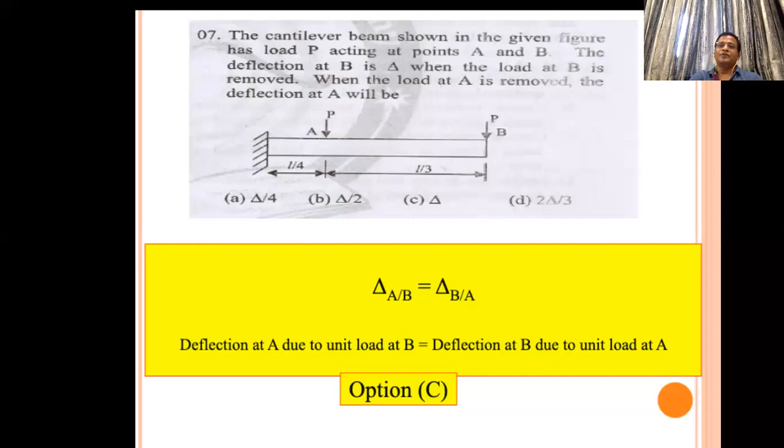So what it says is a cantilever beam shown in the figure has a load P acting at A and B, the deflection at B is delta, when the load at B is removed. So this is nothing but coming as a definition of the reciprocal theorem, and that's why it can be easily taken.

Next, a system of a simply supported beam with a point load P at midspan. So you can see the numericals are not much, but tricky problems are there. If you think you can solve the numericals, that's not useful, you have to understand the problem and try to give the answer. That's very important. A system of a simply supported beam with a load P at midspan, and a system of the same beam with a UDL of intensity P by L.

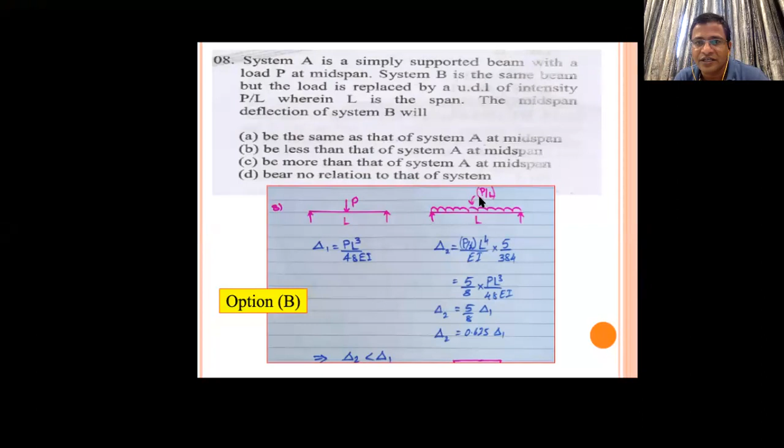So they have connected P and P by L, so that taking the ratio becomes easy, where L is the span, the mid-span deflection of system B will be - so you can see what the relation will be. First of all, you should remember the deflection of a simply supported beam with point load P, that will be PL cube by 48EI.

And in the other case, for the UDL, it will be WL raised to 4 by EI - the center deflection will be 5WL raised to 4 by 384EI, and now W here is P by L. It is substituted here, and then you get this answer.

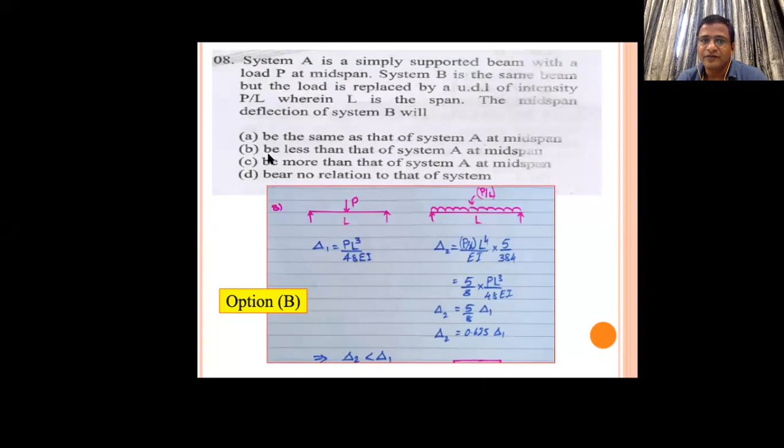And now you can substitute PL cube by 48EI. So 384 is split down to bring out this kind of answer, so that you can find the relation between the two. So you see the relation between the two comes out like this, that means delta 1 is greater than delta 2. So that relation we found here, and we get B less than the system of A, meaning this system's deflection will be less than this.